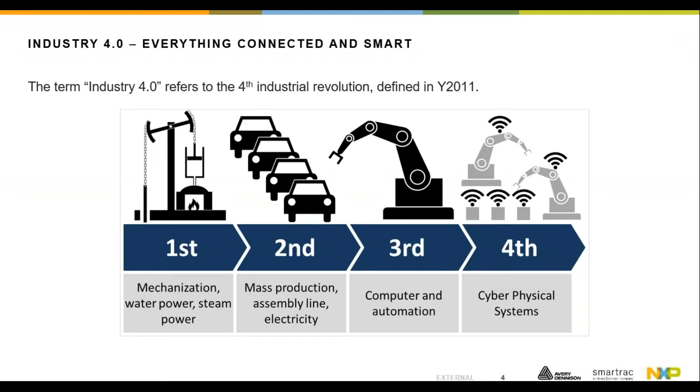And nowadays we're witnessing what we call cyber physical systems. So not only is there computation, meaning intelligence and automation, but also all of these robots are communicating with each other and also communicating even with the objects on which they work on or which they produce.

Now, the second term that is important for us to define would be RAIN RFID. Now, RFID in general should be a well-known term, and there are many different kinds of RFID, from active RFID based on batteries, working with batteries, but also passive RFID that takes its energy from the field, RF field it finds itself in. When we talk about passive RFID, there are also many different types of RFIDs there, from low frequency to high frequency all the way to ultra high frequency.

So what is it that is specific about RAIN RFID and what we mean by that? RAIN RFID is a passive wireless technology that has a read range of several meters, and very importantly, ability to read in bulk, so many items at once. Already today, it is deployed in many different industries and connects billions of everyday items directly to the internet. What it enables is identification, location, authentication, and engagement with those items, making them smart and allowing us to do all of these things with them.

And in essence, it also makes data drop down from the cloud like the rain drops into the sea. It's also one of the reasons why the name RAIN RFID.

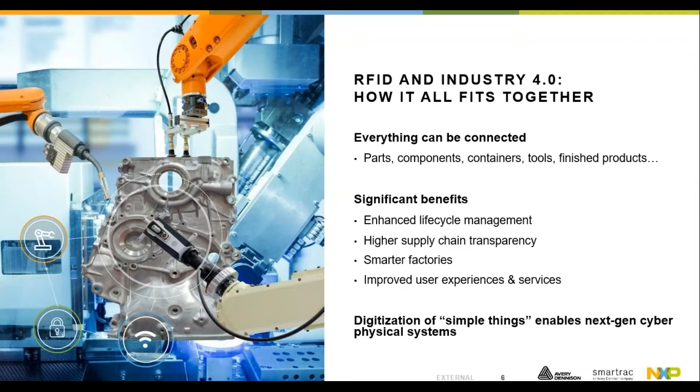Now, RAIN RFID components come in many different form factors. The tags, starting with them as the key component of the system, come in the form of, for example, a paper label that can be attached to an item or object.

They also come in the form of hard tags that can be either glued or attached with screws to those objects, normally used in harsher environments where you can expect certain shock and bumping into each other from various objects.

But they can also, in specific cases, be integrated as parts of the PCBs that go into electronics. The readers, on the other hand, also come in various different form factors, shapes, and formats.

We have mobile Bluetooth-enabled devices that use Bluetooth connectivity to couple with any smart tablet or smartphone.

We also have handheld readers that have a bit more power, a bit more read range than the small mobile Bluetooth devices. And then there are also stationary gate solutions that allow you to drive a forklift through that gate.

With a pallet and many boxes on that pallet. And lastly, on the software side, there is application software that can run directly on the embedded computer on the reader itself. There's also enterprise software in the background that connects many readers to each other.

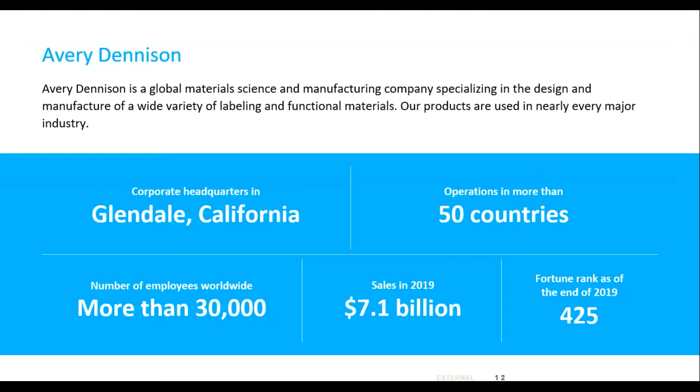But that was about the company itself, and now we can move to our main topic today, which is automotive. Today's talking points: how RFID serves the entire product life cycle, makes component supply efficient and secure, how RFID upgrades your manufacturing to become smart, enables smart logistics, and makes after-sales services convenient and fast. All in all, RFID drives the cost down and efficiency up.

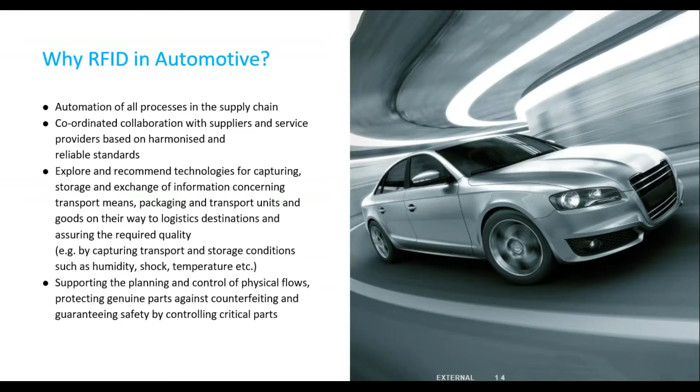So why RFID in automotive? OEMs, automotive manufacturers, want to optimize all processes in the supply chain. They want coordinated collaboration with suppliers and service providers based on harmonized and reliable standards. They want to capture, store, and exchange information concerning transport means, packaging, transport units, and goods on their way to logistic destinations. They also want to assure quality of critical parts. OEMs need technology for planning and control of physical flows, protecting genuine parts against counterfeiting, and guaranteeing safety by controlling the critical items.

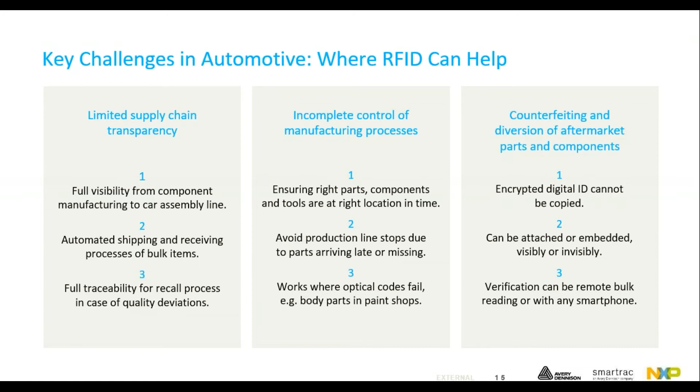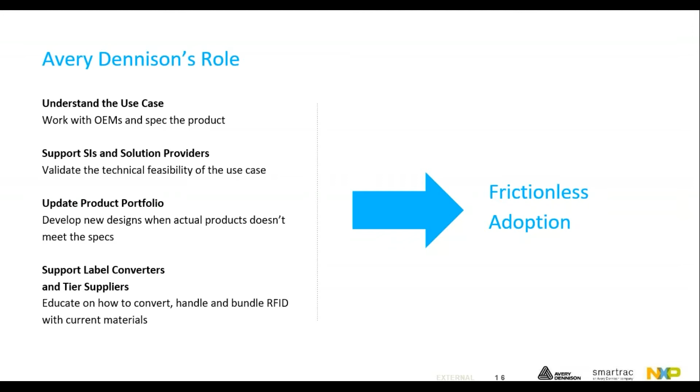That was generic about our position and what are the needs. Now we can move forward to the automotive use cases.

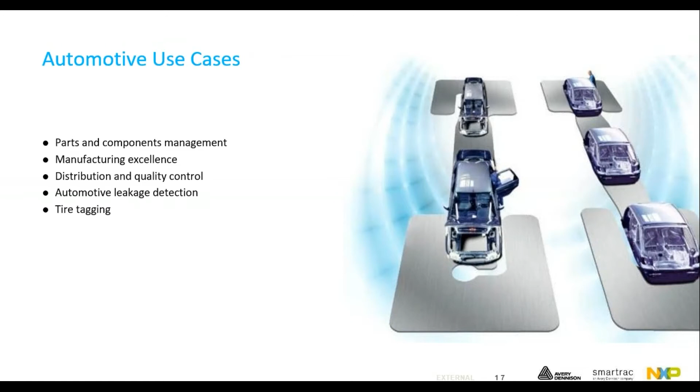So, parts and component management. This is the fastest growing business area for RFID in automotive. All components in cars are already marked with RFID in separate projects - bumpers, seats, airbags, engines, gearboxes, you name it. We have worked with all of those and we are happy to support you with them.

RFID offers great visibility for component manufacturing and supply chain. It will start from the raw materials to component manufacturing, car assembly line, and all the way to the end users.

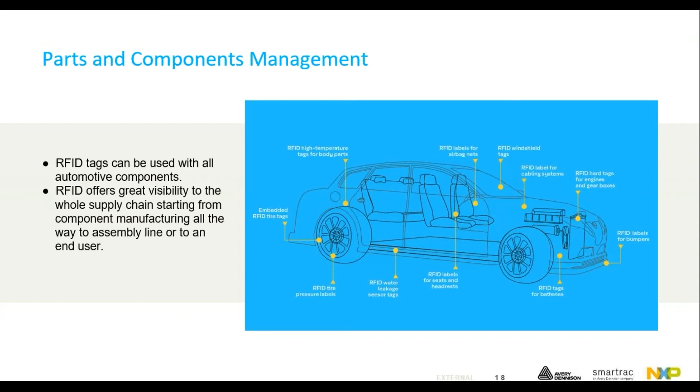Recycling is also an interesting topic, and how we can improve component recycling in the future by sharing information of the used materials with the recycling company will be getting more and more important.

Today's automotive applications are quite often closed-looped. It means that it's focused on production logistics applications, especially on the Tier 1 or OEM side. Products are encoded, labels are positioned, and transponder types are defined by these independent companies.

Now we are moving forward, and we see larger and larger applications, which are quite often now driven by the OEMs, but which combine the industry together. Information will be shared between the companies in the whole supply chain.

We need to be able to track and trace critical parts from the raw materials all the way to the car dealers or even to the end users. To be able to do that, we need to work together.

RFID offers great visibility, and at the end of the day, it improves vehicles' quality.

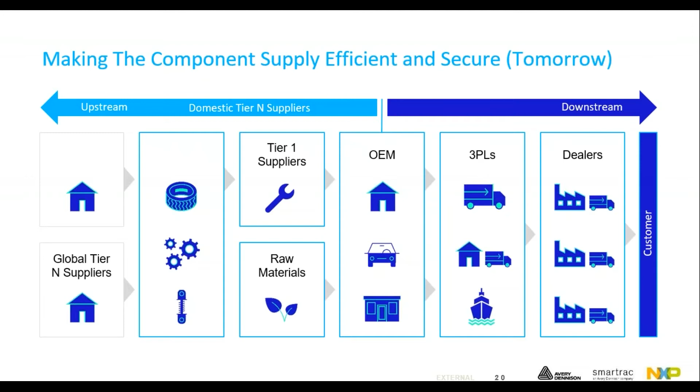RFID is widely implemented by European OEMs. All German OEMs, for example, are using RFID today. One important point there is the VDA Association, which is led by Jörg Wolter. They have had huge influence on that.

There are many standards available globally, and from our point of view, it's crucial that new projects define which standards they are following. In the future, there will always be RFID transponders around you, so even for closed loop applications, you should always follow certain standards to ensure reliable applications.

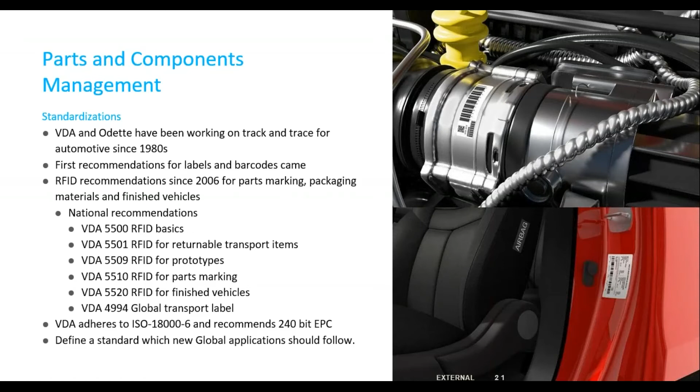So Smartrac is now part of Avery Dennison, and I'm excited about that. Avery Dennison has outstanding material knowledge. We are already delivering adhesives and label materials to the automotive industry.

We have specialized teams to support our partners on how to test and qualify materials, and how different label structures work in challenging environments.

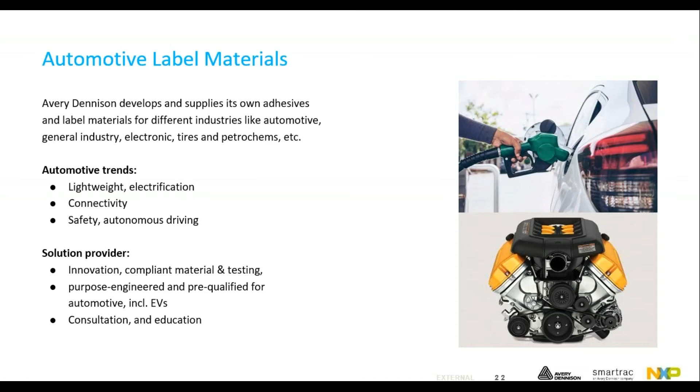So today, Avery Dennison label materials are used for interior, exterior, and underhood applications, marking batteries, engine blocks, seats, tires, airbags, cables, cable harnesses, you name it.

This offers us a great foundation to bundle our knowledge for new applications and to support our partners. So if you are planning to tag safety equipment or a component which needs specialized qualification, we have experts to support you.

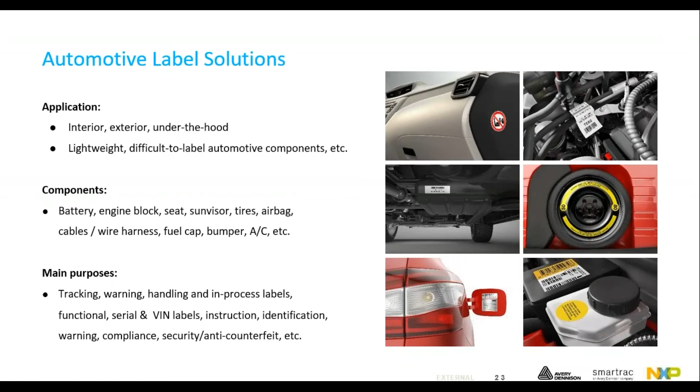As mentioned earlier, part and component management is the fastest growing RFID application area in automotive. Avery Dennison, together with our experienced partners, are actively supporting OEMs, Tier 1s and Tier 2s to find the best suitable products for their needs.

We have extensive field organization to support you, and we are proud of how we handled the challenging first half of 2020. For us, customer service and product availability are very important topics, and that's also something we are very proud of.

From the internet, you can find a few very interesting success stories. For example, Daimler has published a video of the mirror identification application. Rehau is tagging bumpers with our short dipole, and Duerrkopp has built a nice logistics solution for Faurecia.

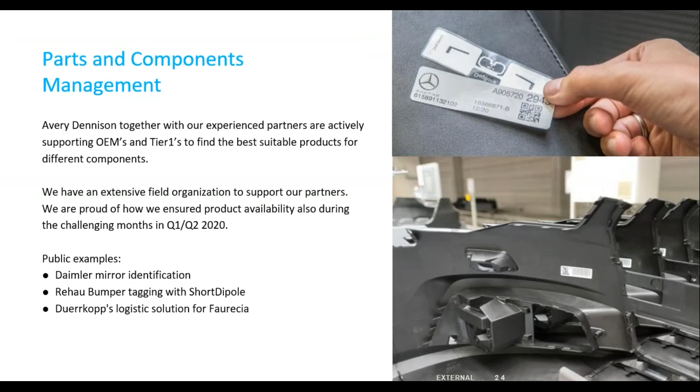To summarize it, RFID offers great possibilities to automate track and trace solutions for critical automotive components. It offers full visibility for the whole supply chain, from the raw materials until vehicle distribution, or even beyond that if needed.

RFID helps to avoid counterfeiting and delivers material information together with the components, and that will enable new applications in the future.

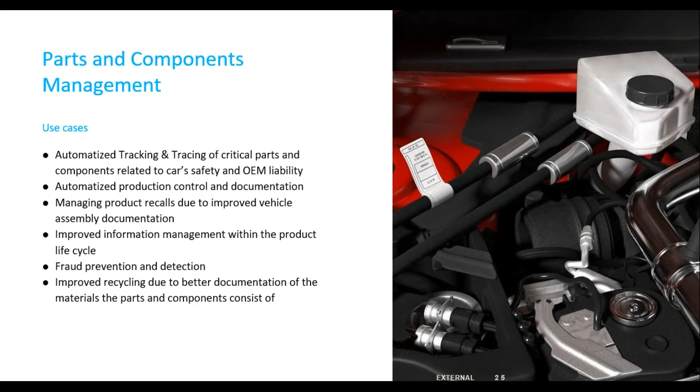So here are a few products which we often recommend to use for parts and components. For plastic parts, we often recommend our Short Dipole, Belt, or Mini Web products, or from Avery Dennison side, AD 373 with UCODE 7XM. We also have a huge portfolio for on-metal products.

For metal applications, we have Skyline, which is a high-performing printable on-metal label. Midas Flag Tag, on the other hand, also offers great performance with a lower cost. At Avery Dennison, we also offer all kinds of transponders, all frequencies, all form factors, whatever you need.

We also have our hard tags available for component tagging when needed. For example, MaxRap Bond and iDisk families are offering great performance and reliability for you. From the Avery Dennison side, we also have a great thin on-metal label called AD456 with UCODE 8.

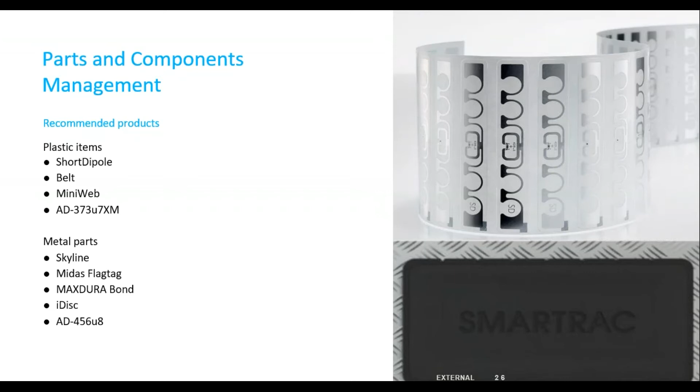To move forward with the automotive applications, this is where we started over 10 years ago, manufacturing excellence. Many paint shop and body shop lines in Europe are running with our transponders. We have our own portfolio of high temperature inlays and hard tags to ensure superb reliability for this application.

Also, we can offer all our RAIN RFID products with high temperature substrates. Typical temperature in a paint shop line is around 200 degrees C. It depends on the car body material, if it's steel or aluminum, what is the maximum temperature.

From the hard tag side, we have products for car body identification and also for skids. For skids, we have developed Maxdura Case, which can survive up to 1,000 heat cycles. For car bodies, we have Maxdura Turtle, which can be attached to the car body before the paint shop line, and it offers identification all the way from the body shop through the paint shop assembly lines all the way to the car dealer.

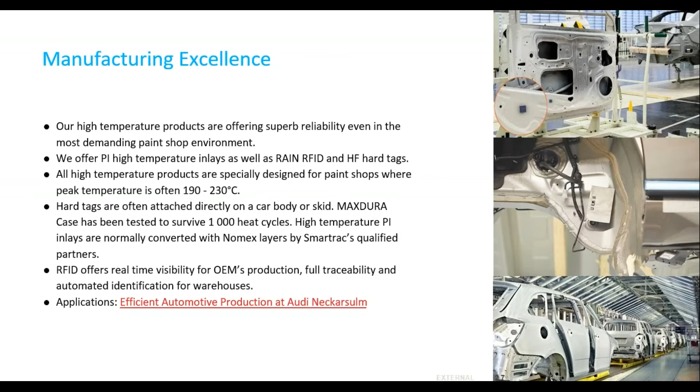On the right-hand side, the first product you can see is our polyimide short dipole. This product is normally converted with Nomex layers by our experienced converting partners. As mentioned earlier, also our Dog Bone and Belt, for example, are available with high temperature polyimide substrate.

The product in the middle is Maxdura Case for car body and skid identification, and below we have Maxdura Turtle for car bodies.

Next application is logistics and quality control. Here, RAIN RFID is a standard technology for the logistic application. It offers fully automated applications, real-time visibility for every step in the supply chain.

Automated shipping notices are enabling companies to offer better services without additional efforts. Our products are offering great read distance for all logistic and quality control applications.

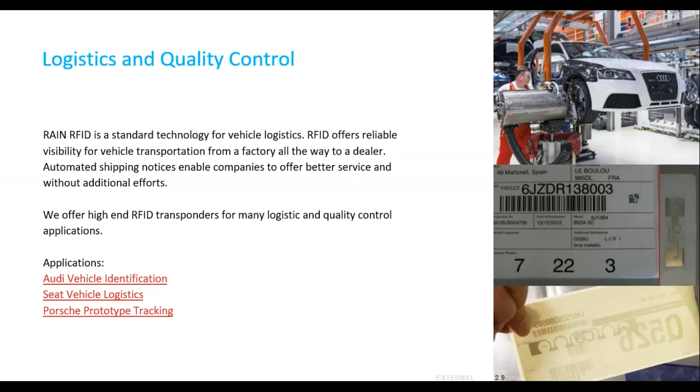Volkswagen Group has optimized its logistics and services with RFID. I would recommend checking how Audi is handling vehicle identification and SEAT the vehicle logistics. Also, Porsche has published the prototype tracking application, which is very interesting to check, and there are lots of good solutions around it.

Logistic and quality control applications normally require longer read range, so for that reason we normally recommend bit larger products with larger footprint. For example, Frog and Dog Bone. Also from the Avery Dennison side, we have AD 663 and 665, which are offering great performance.

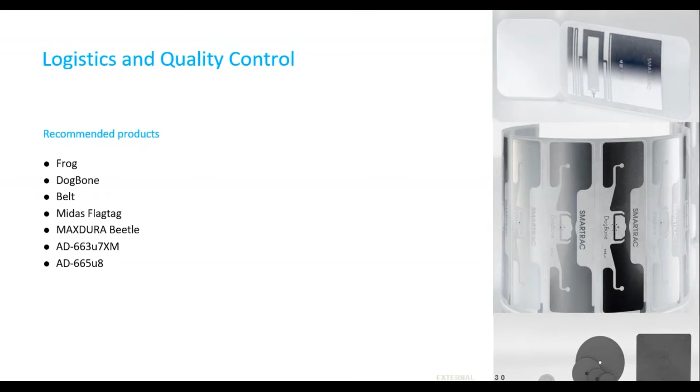Moving forward to the next application area, which is automotive leakage detection. This has created lots of interest during the last years. Sensor Tadpole is our specialized product for the application.

It's a fully passive water sensor. It means that there's no battery, no additional components to it. So the product structure is similar to our standard on-metal labels.

It can be inserted directly on a car body under insulations and carpets, and the sensor value can be read through windows without opening any doors or trunks.

Normal sensors are read before and after the shower tunnel. We save and compare the sensor values, and based on that, we can reliably recognize any leakages from the car.

Our partners have finalized solutions available, so at the moment there's no need to start long-term development projects anymore.

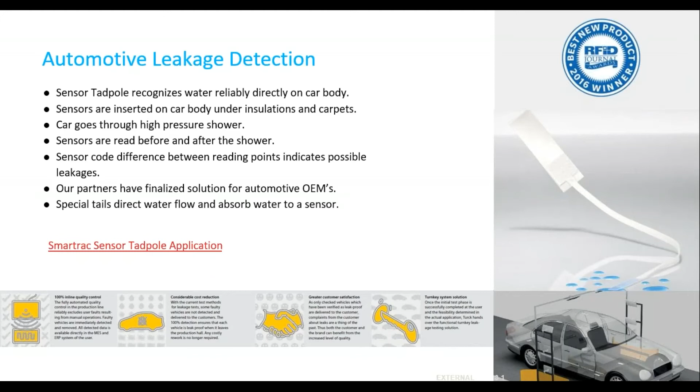Our last application area is tire tagging. We expect tire tagging to grow rapidly in the following years. Target application is normally traceability for tire logistics or identification over the tire lifetime. ISO standardization and new legislation in Asia will speed up this application area shortly.

We recommend our Dogbone or new AD8600 product for logistic applications. We also have a hard tag available, which can be embedded inside tire rubber. It can be offered with a primer and overcoat if needed, and it's tested with the tire manufacturer to survive manufacturing processes and offer identification over the tire's whole lifetime.